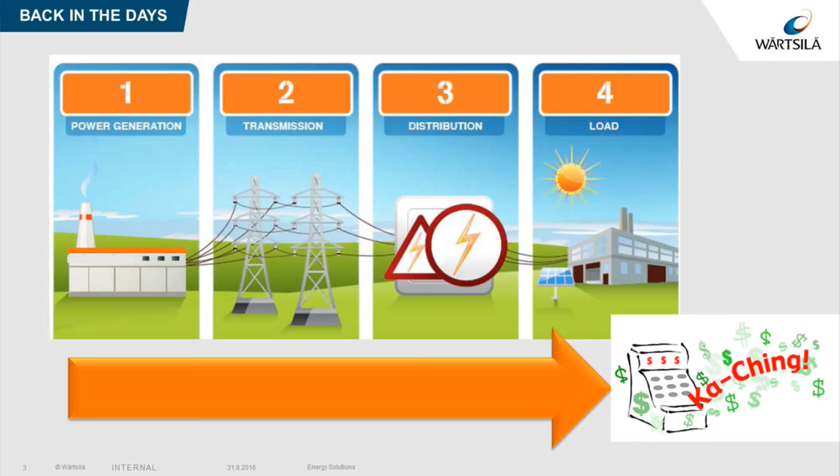And you kind of knew always what the load would be from season to season, from day to day, based on earlier statistics. For many of the energy companies, it was just cashing in with the money. Now this is changing. This is changing fundamentally, and new business models have to be found. So there's a lot of big changes going on.

We had the wind coming first into the market, so to say - the wind energy and the wind players, you all know this. After that came solar energy, and let's say from a capex purchasing perspective, even cheaper than the wind, and definitely from an operation and maintenance perspective, very cheap.

But there are some things about these renewable energies which make them difficult to handle from a power system perspective. I think you know what it is - it's the variation. The sun doesn't always shine, as you know, and wind is there sometimes, but can you be sure that you have the needed power generation when you always need it? How can we ensure the reliability? How can we ensure that the lights stay on in this auditorium at all times?

Especially here in Finland, we are really used to having a reliable power system. How many of you remember when the power has been out the last time? Hands up. Not too many. Go to Bangladesh and ask the same question, and some of them will remember when the lights were on, if I exaggerate a little bit.

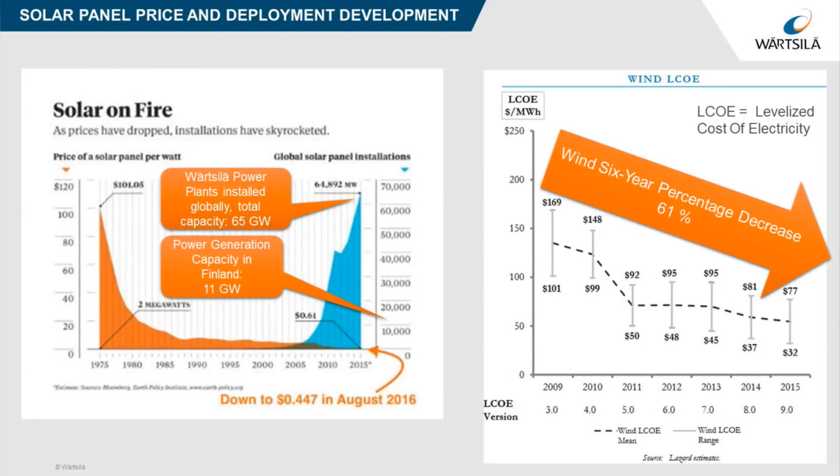This is the lowest we have seen so far, from 3rd of October in Saudi Arabia. This price was with the solar panels only, but then of course you need some auxiliaries—string converters, frequency converters, cable connections, transformers, grid connections, switch yards. So the total cost is below 2 cents per kilowatt hour in Saudi Arabia now.

A 300 megawatt solar project that would power maybe around half of Helsinki's needs, if you have the real power there.

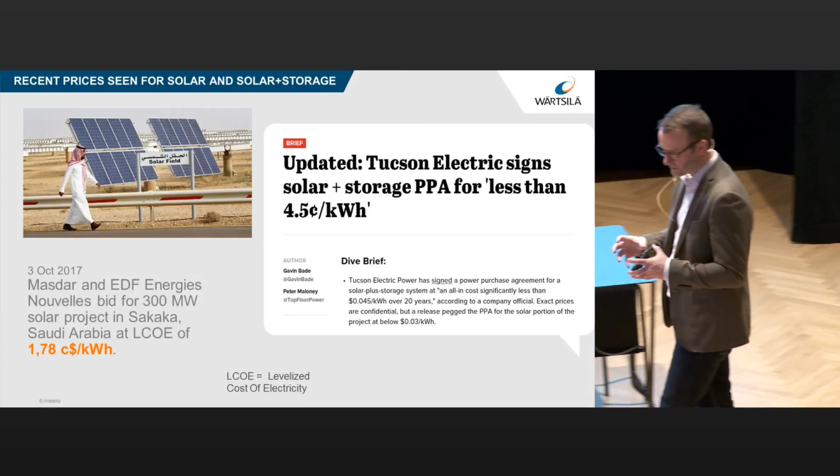Another interesting case, this is from Arizona, Tucson Electric Power Company. They made a bundle deal with solar and storage. PPA means power purchase agreement, of 4.5 cents, US dollar cents, per kilowatt hour. Really, really low price for a bundled solar and storage deal.

And at that point, we had people saying that, well, now you don't need any peaking power anymore. You don't need any gas-fired solutions anymore, because if you can have this bundle deal for solar and storage, then there's no way out.

So the question we are asking ourselves as a company now, Wärtsilä, is: is there room for us in the future? Or can we rely solely on wind and solar and energy storage? Elon Musk is preaching that it'll work. We maybe don't totally share this, and I'll talk about that as we go further now.

But really interesting strategical question for us as a company, because we apparently build and deliver these, and we have the LNG solutions there as well.

So let's bring in some ducks. Anyone know this duck's name in Latin? Me neither. Nevertheless, I brought in a duck here so that it would be easier to explain if you hear about something called the CAISO duck from California.

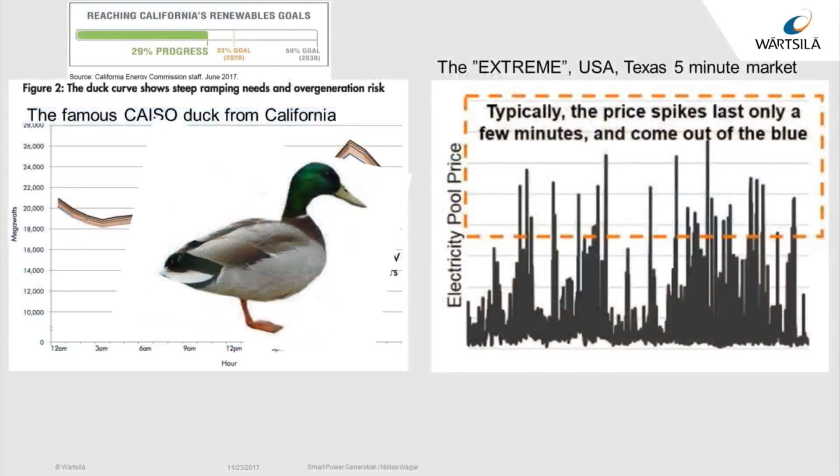CAISO is the system operator in California, the electric power system operator. And if we get rid of the duck this way, you'll see the back of the duck here and the head of the duck here. This is the hourly generation on the x-axis during a day.

So here's morning, 3 a.m., 6 a.m., 9 a.m., lunchtime, and then afternoon. Here is the y-axis, the megawatts needed, or in gigawatts, 20 gigawatts needed during the nighttime in California at the moment. These are curves that we look at a lot, because we need to model the daily changes, the hourly changes, in order to see how our solutions fit into the system.

When you look at, and think again about the poor duck and the back of the duck, this is the power you always need during the day. And why this is dropping down here is because they have projected the solar installation amount in California. So the more solar they get in California—and you know there's a lot of sun in California—then the daily need for other generation is pushed down.

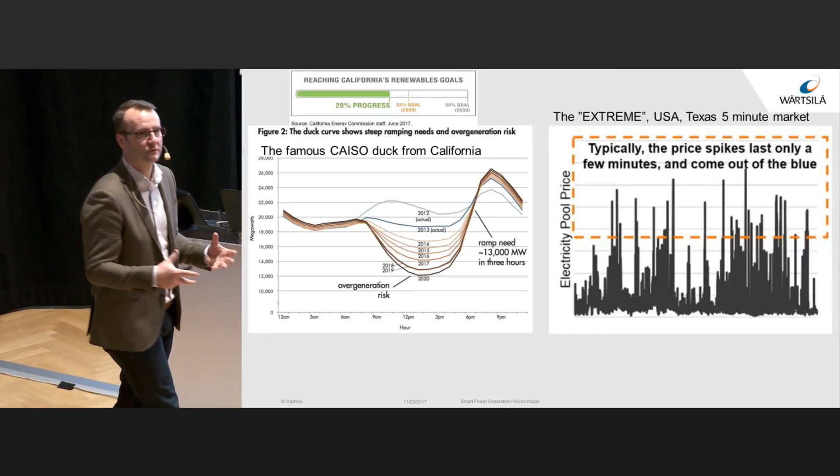The problem with the duck head is that in the evening the sun is setting but it's still hot, so you need coolers, usually electrically driven. You also have other appliances - you've been out all day with your iPhones, iPads, maybe some Samsungs, and you need to get their energy back to them, plus other appliances needing electricity in the afternoon. So you have a huge peak always in the afternoon, and then you'd need to ramp 13 gigawatts in this scenario in 3 hours - like powering up all of Finland's generation capacity in a few hours. So how do you do that?

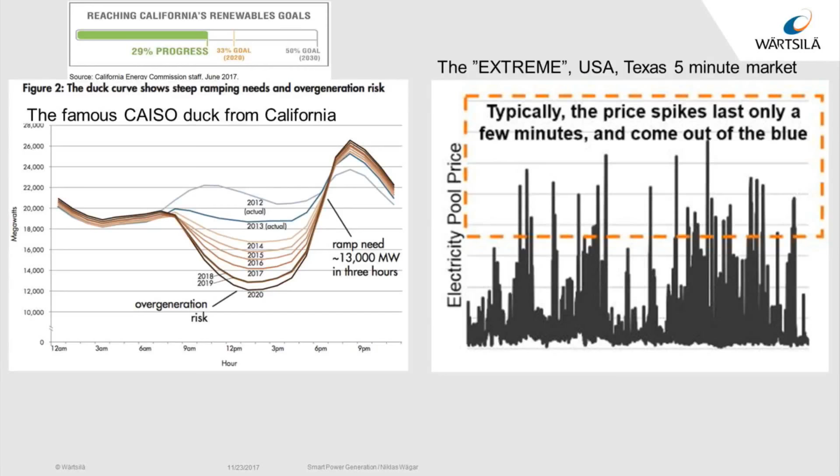When you look at the progress California is making, because they really want to make a mark in terms of being green in the US, they have 29-30% progress toward reaching a 33% renewables goal by 2020, and 50% renewables. But not even in California do they think they can do it solely with renewables. The other interesting point is that not only in Texas but in many other states, they've allowed for a really free electricity market.

They have an electricity market now which is a 5-minute market, so they actually allow for price spikes when the wind isn't there and the sun isn't there - really high price spikes. This means the electricity pool price can have spikes like this during the day. If you look at Nord Pool in the Nordic countries, it's really stable, and thankfully we have hydro in Sweden and Norway, some in Finland, that we can rely on. It would of course be excellent if you always had the hydro there to do the balancing of the renewables.

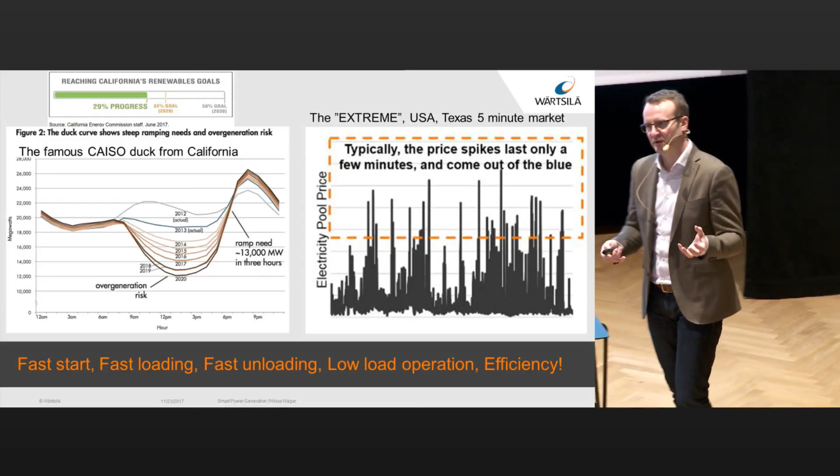But what do you need in order to follow the neck of the duck? You'd need generation that can start really fast, take load, start producing power, and ramp up and down in loading really fast. You'd need fast unloading too, meaning when the wind blows and the sun rises, you can pull down the generation. You'd need low load operation so you're ready to go when needed. And you'd still need to be efficient, especially with fossil fuel generation - you need as good a heat rate as possible to make the best use of the fuel.

What we see now in certain states in the US is that it's not the traditional generation that's the base load anymore - nuclear, coal, or similar. We see, especially in the windy states in the middle of the US, that renewables are becoming the new base load. They have such tremendous amounts of wind that they can provide the new base load, especially during daytime when the sun is there as well.

But what you need is something flexible for balancing consumption and generation, because generation and consumption need to be equal at all times - you need to have the scale and the balance. Yes, you can store some in batteries, but not enough to keep the lights on at all times.

We've been working a lot around these items because people realize the wind is fluctuating, and people know the sun is rising and setting every day. This would be a perfect curve if there weren't any clouds in between, but you may also have clouds in between. So you need something there to keep the balance.

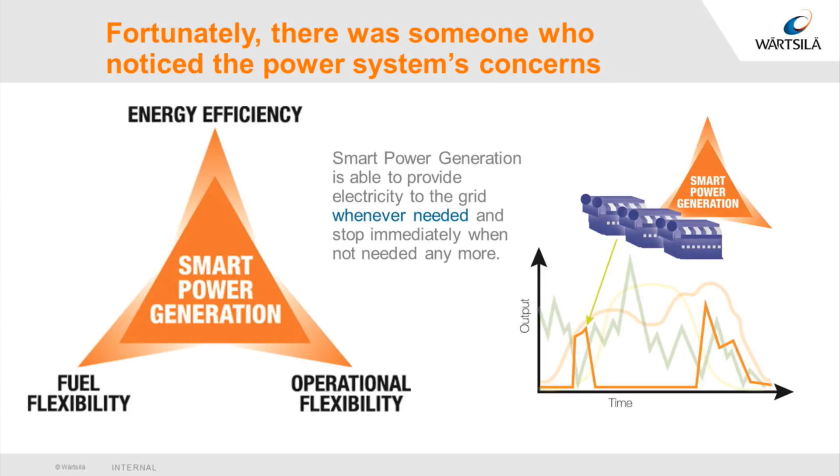We noticed this happening and tried to bundle it into a package we call Smart Power Generation. Smart Power Generation is about fuel flexibility. It's about energy efficiency - when you operate, you need to be really, really efficient. Smart Power Generation is very much about operational flexibility - how can we have an asset, a generation that can be really fast in starting, loading, and unloading? And that's what our solutions can do.

We didn't leave it at only looking at what we could provide as a solution. We checked and analyzed, calculated together with different authorities and energy companies, what this means for your power system. What can we do to your power system to still keep it reliable, keep it affordable, and naturally also sustainable? That's what Wärtsilä brings to the market.

Didn't I do a great job? No corporate slides before slide 14, right?

This is the thing. We bring efficiency to the market. We bring environmental solutions to the market. Gas-based, LNG, clean tech, if you like. And we bring the fuel flexibility. So this is what we bring to the market.

How we bundle it is into engine power plants, looking like this. This is one of our first LNG installations in Tornio, which has had recently a mechanical handover. And the first ship with LNG has just arrived to Tornio, so now we will be able to test and validate also with the LNG coming into this terminal.

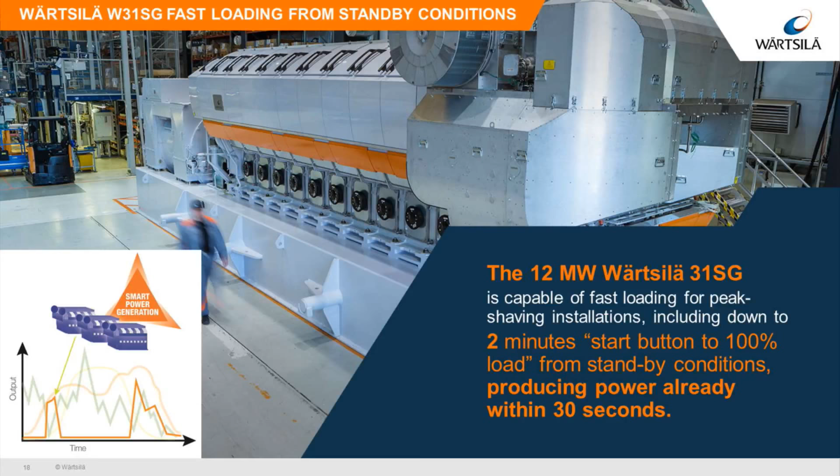First of all, the prime mover, the core thing for us is still the engines, and it will remain so. For 20-30 years at least ahead, these engines will have a big role in the future power systems. Why? Because they are fast, they are flexible, and when you need them in simple cycle efficiency, they are the world's best. They are better than gas turbines in simple cycle efficiency.

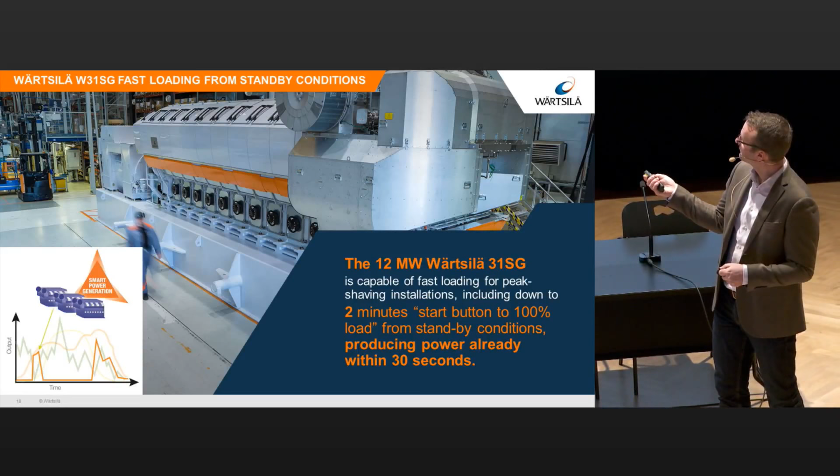This particular engine is called Wärtsilä W31 because the cylinder diameter of the pistons is 31 centimeters. We launched this new product to the market actually last week. It's 12 megawatt in unit size. Here's the generator. Here you have 10 cylinders, and then there are 10 cylinders on the other side.

And here's a turbocharger. The interesting thing with this is that you see, here's one of the assemblers. This piece you can get into full load 12 megawatt in 2 minutes only. And when you think about again the renewable side and the variations with renewables, 2 minutes is all you need. So you can wait for the decision to start your asset until it's really feasible from all perspectives. And in only 30 seconds, you are synchronized to the grid and start to provide power.

Talk to any power company guy, and these are values that they like. 2 minutes to full load, and if you have a number of these, 10, 12, you can have 100 megawatt, 120, really, really fast. So coming back to how have we been looking into the total power system and what can we do in terms of supporting the power system.

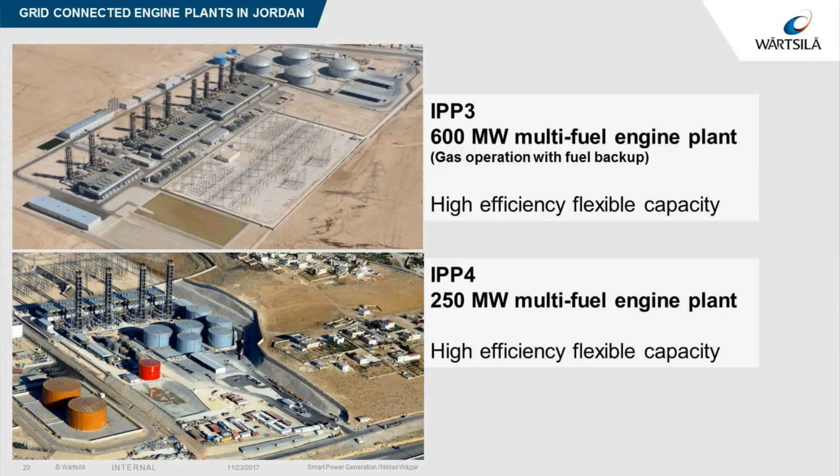These are a few examples from Jordan, 2 fairly big power plants, also from our perspective. One is called IPP3, 600 megawatt, and the other one is IPP4, 250 megawatt. These power plants were delivered as operating on fuel, and then we converted them to gas operation.

And the interesting thing here is that before these engines and engine-based power plants were installed in the system, you had the following variation. If you remember the California duck curve, which was a daily curve, this is now a weekly curve. So you go from Sunday, Monday, Tuesday, but you see a little bit of the same pattern there, that of course you have less need of generation in the night time, and then in daytime when industry, schools, service companies, whatnot is starting, then you need more power.

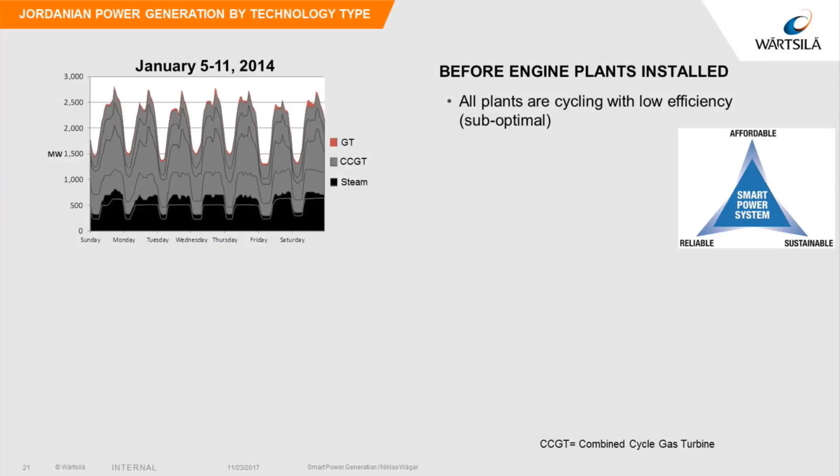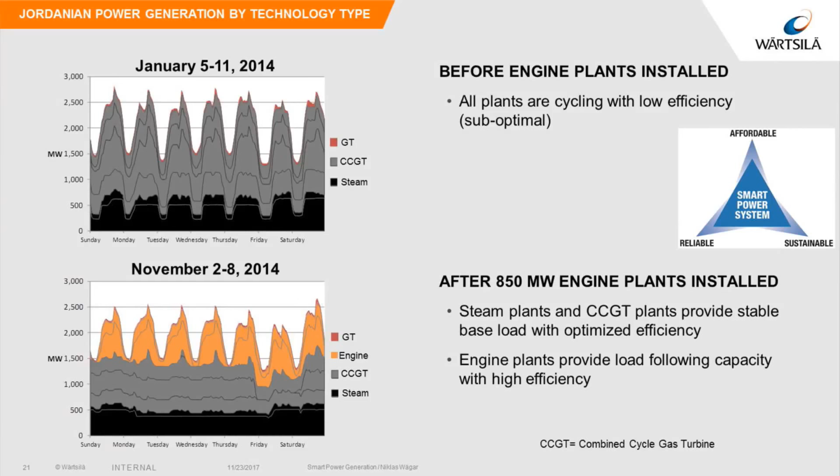In this case, you have some steam generation, probably coal, combined cycle turbines, and some peaking turbines, and you can see a lot of variation up and down. After we installed the engines, we took care of this peaking up and down with engine solutions. This meant the steam generation could continue to operate, but more in base load, meaning they operate at a more stable operational point where total efficiency is higher. And since we have really high simple cycle efficiency, from a total system perspective, the system efficiency is higher.

So we could still maintain the reliability of the system. We can have sustainability because you cause less emissions when you can operate on a stable point with these units, and so on. So that's one of the case examples.

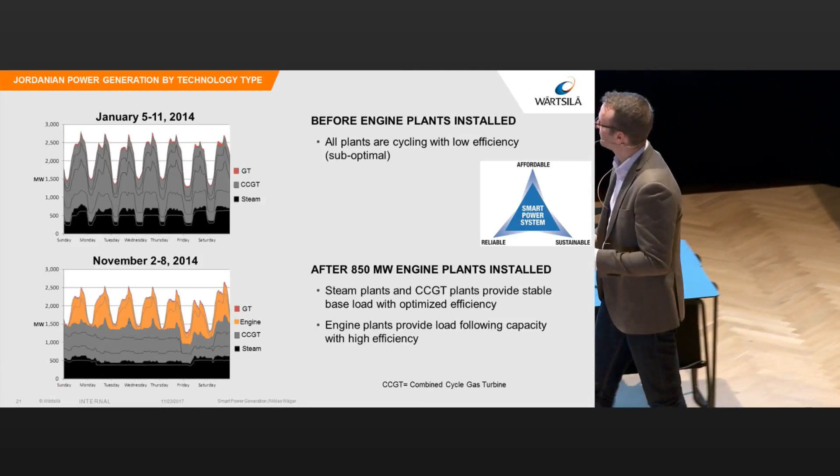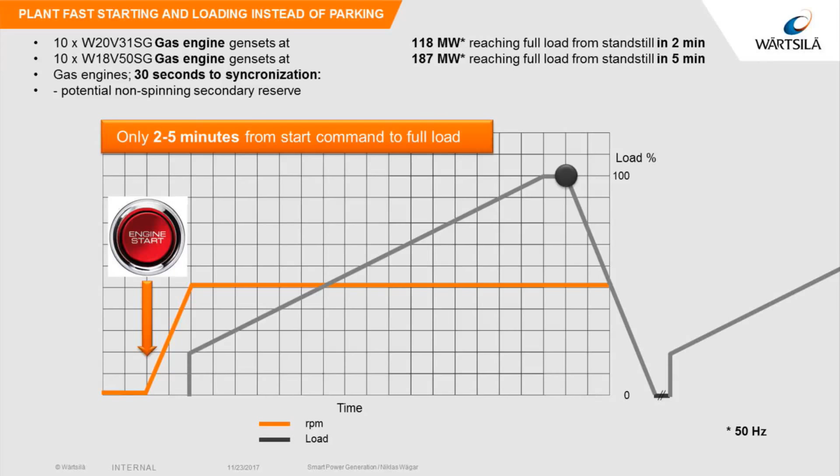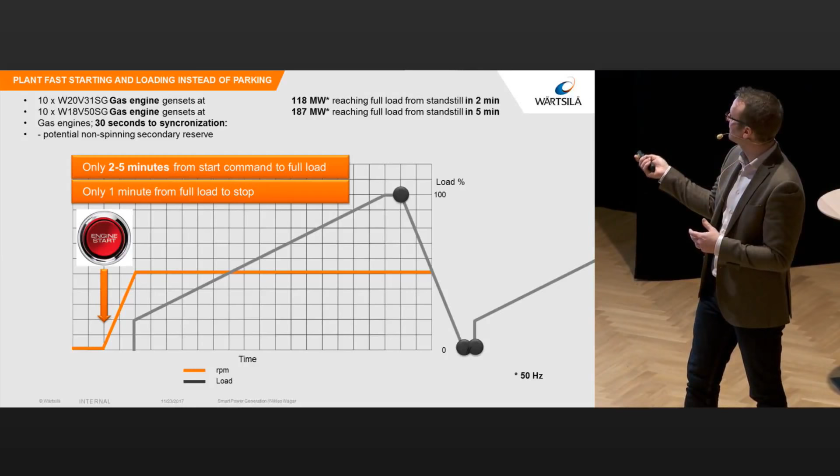So as I mentioned, with these units we can go to 118 megawatts in 2 minutes, and with the bigger gas engines that we build in Trieste, Italy, we can go to 200 megawatts in 5 minutes easily, because you can start these engines simultaneously. You don't have to wait for one and then the other and cascade them, you can start them as per the need. And again, the good thing is that you can stop them and unload them really fast. Of course, you can cancel this decision at any point and go back again, and then there's just a few minutes of safety checks, and then you can start again.

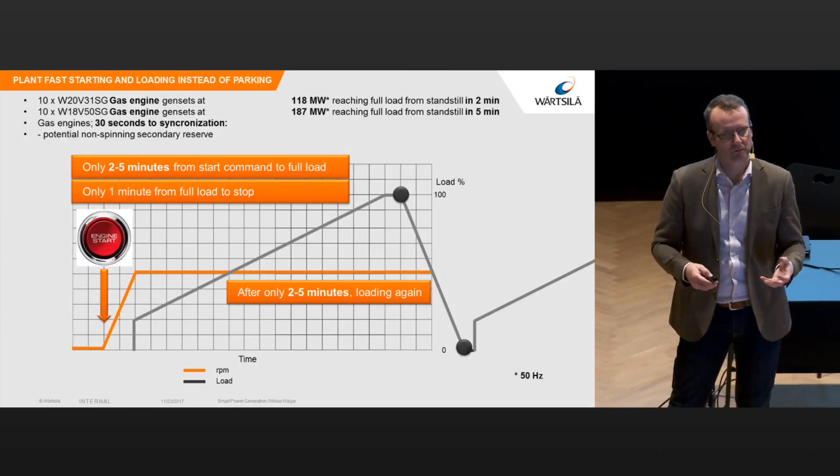Several times a day. This is also good because the predictability with solar and wind in the system is different to what you have otherwise. And then it's good that you can start and stop several times a day without major impact, or more or less no impact on the whole life cycle from an O&M perspective.

Another case example, this is from Turkey, a plant consisting of a number of our 50 product gas engines built in Trieste, Italy. This is a screenshot from the SCADA system in the control room. What you see here is a 2-hour x-axis curve of a historical trend, and on the y-axis a scale from 30 megawatts to 110 megawatts. You see two different trend pens printed in this chart from the historical operation of this plant.

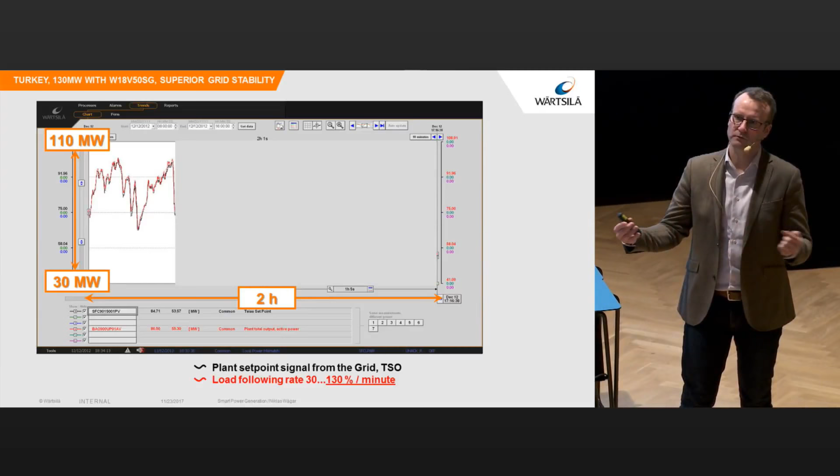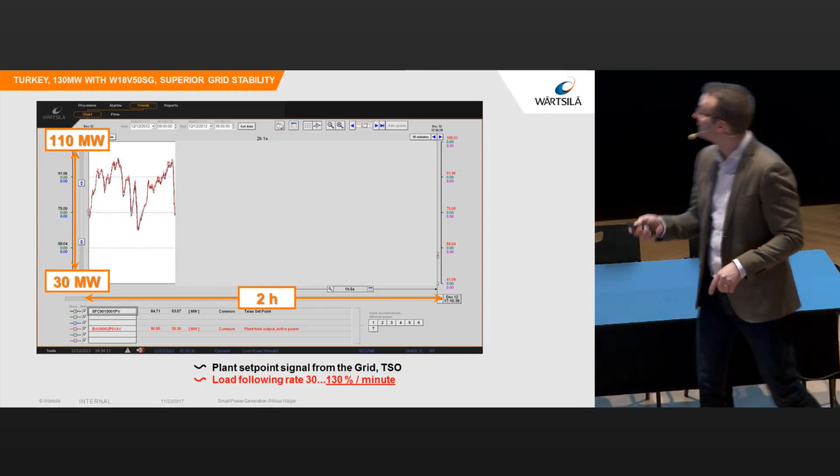The black pen is the set point coming from the transmission system operator grid control center, so that's what the grid and power system need in order to stabilize the grid. The red curve is how we follow with the plant. As you can see, they really lie on top of each other here, so you really follow the demand.

The interesting thing comes always at this point, or whatever point here, is: where should I go next? Would I need more power? Would I need less power? Can I run flat out for a while? And we say it doesn't matter, because you can follow however is needed. You can be really chasing the wind, chasing the solar with these types of units. You can go up and down all the time like this.

And you see, we follow the set point coming to the power plant with a 1 second interval, really fast, and follow the power needs closely. This is also what the power system guys like, and what you as a consumer want to have, because you want reliable power, and you don't want to remember when you had a power blackout or some disruption in your power system the last time.

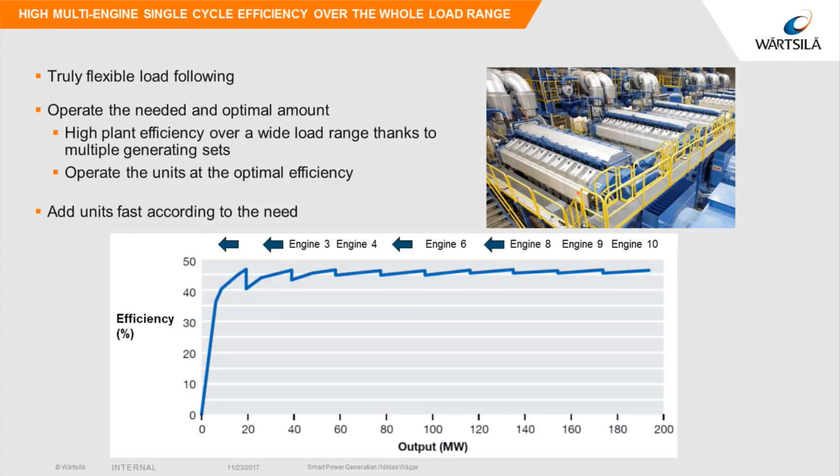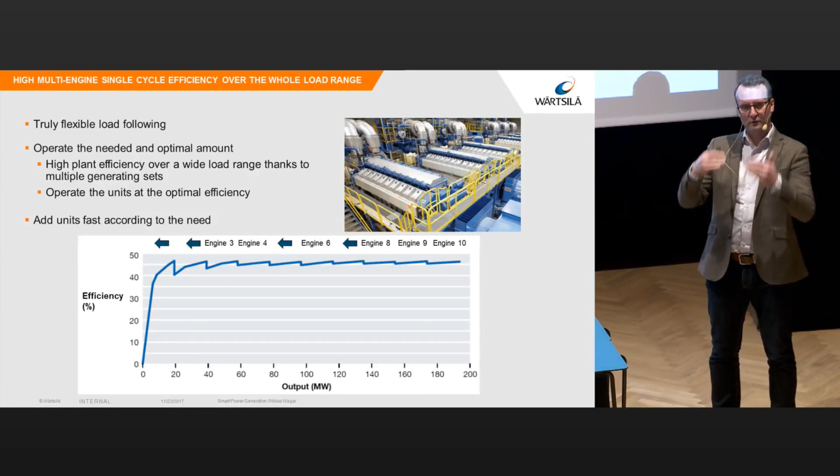If we talk about efficiency, how can we maintain high efficiency? That's based on having multiple units. So you have a number of engines there, all of which are 45, 46, 47, up to 49% simple cycle efficiency, and then you operate the needed amount. If you have a big unit, usually the efficiency curve drops off in part load operation—you cannot maintain as high efficiency. But when you operate only the needed amount of engines, you can always keep the total efficiency high, at 45-46% levels. So this is part of the beauty of having multiple engines and multiple generating sets in the power plant.

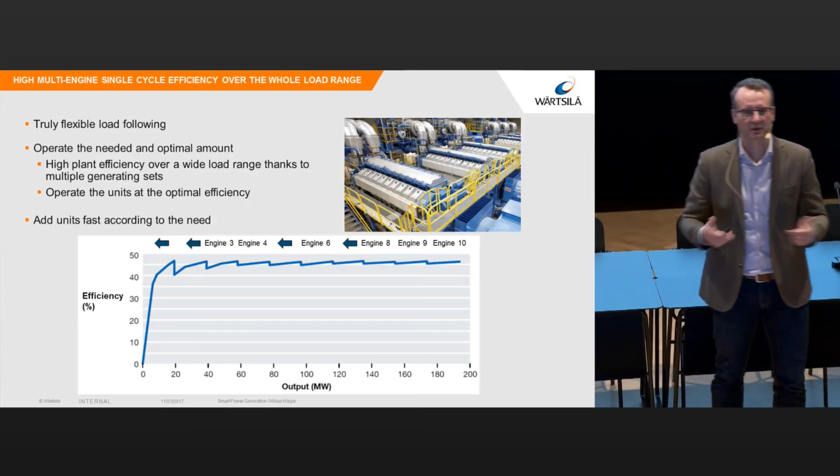The other thing is the reliability aspect here, because should there be some issues with one of these engines, it's 1 out of 8, 1 out of 6, and so on. So you can work on the reliability also on the asset itself.

Fuel flexibility is another interesting aspect, for those interested in chemistry. There's a wide variation from liquid fuels into gas. The main intention with this slide is to show what kind of solutions we have to cover different kinds of gases. Biofuels are somewhere here, so we have solutions to operate on biofuels, and biogases are somewhere here, not visible now in this chart.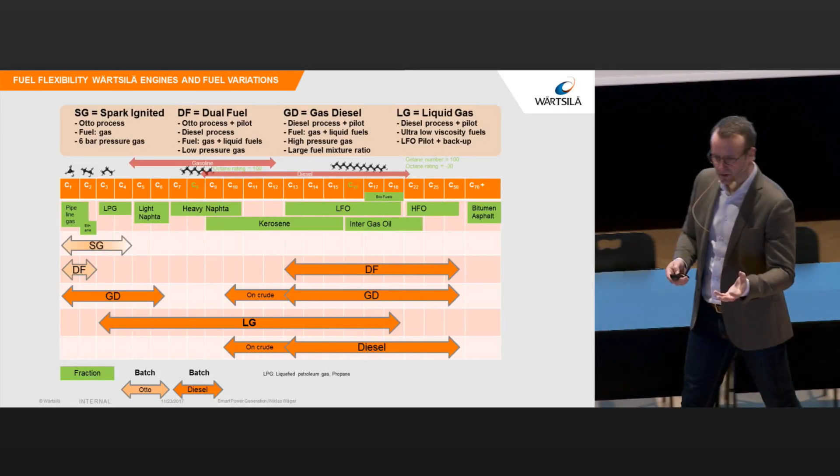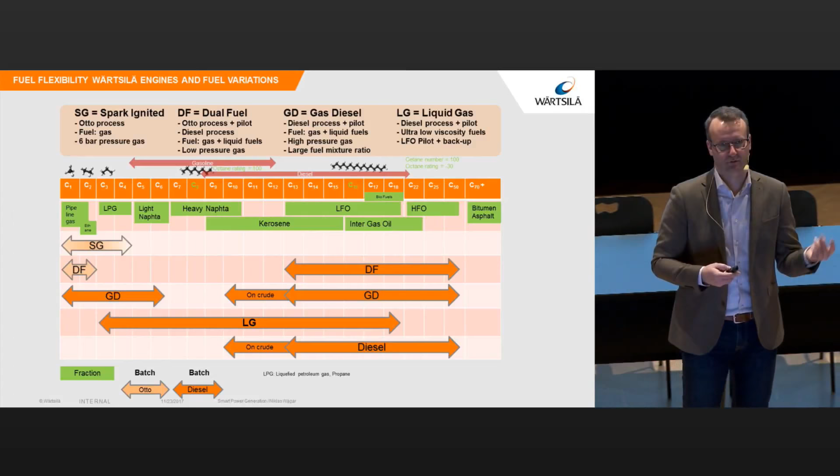The solution is that there are possibilities for certain fuel flexibility depending on the needs, and this is important because if you go out to very remote areas with gas supply problems, you may have to operate on liquid fuels for a while, then switch back to gas immediately. Our units can switch over to liquid fuel without the generator coming down, and you wouldn't even notice it in the frequency operation.

This sounds all fairly good, right? So have we had any successes except the Jordan case with our smart power generation messaging? Are we getting heard by power companies, investors, and the likes from the systems we have? Actually, to a fairly good level.

We believe so strongly in our potential with smart power generation assets that we've been writing a couple of books. First, we made a book called Smart Power Generation, an orange book. Then we did another book called Power System Challenges. The first book is sold out, so maybe you can only find it on eBay or something nowadays. The blue book is still available, and you can download it at this site.

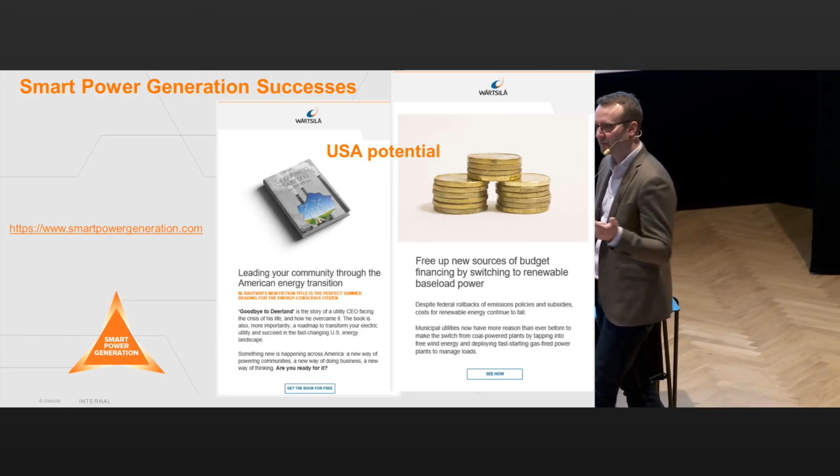Recently we made a third book called Goodbye to Deerland. This book tells about a utility in the US that's been investing in a coal-fired power plant. It's built a bit like a storytelling book based on facts, about a utility guy who's really proud of his coal-fired power plant. But then comes this energy revolution with wind assets and solar into the system, and sooner or later he realizes he can't operate his beloved coal-fired power plant for the future.

Not only from an emissions perspective, but actually from an economical perspective. At some point he needs to decide what to do to keep the lights on in his company and keep the customers happy. And sadly enough, guys, everything comes down to the money. We have to think about return on investment, and what's the value for the end customer in US dollars, euros, or whatever currency is in these different locations. So we do a lot of analyzing and look into the money aspect as well.

I know you'll go to the smartpowergeneration.com site, and there you'll see real life cases. We've done a lot of modeling in different places all over the world. Different states in the US have different power pools, like the Nord Pool in the Nordic countries. In Texas it's called ERCOT, PJM in Pennsylvania, New Jersey, Maryland, and so on. There are some other cases here as well. So we've looked at these different cases and tried to see what the value would be in these different markets.

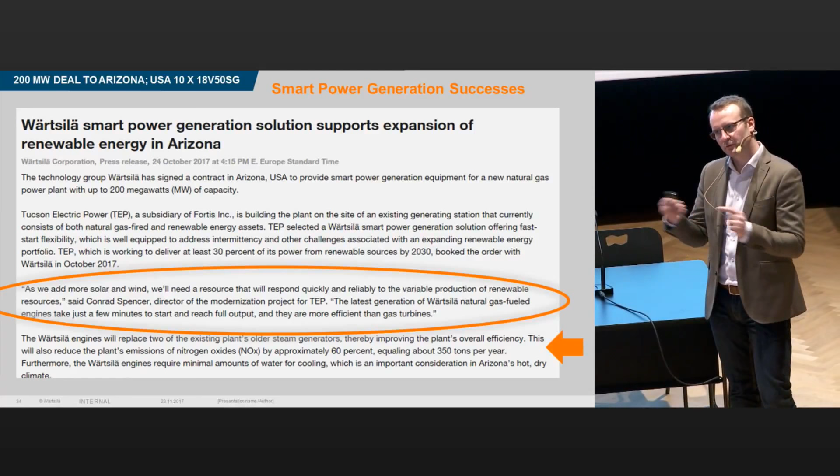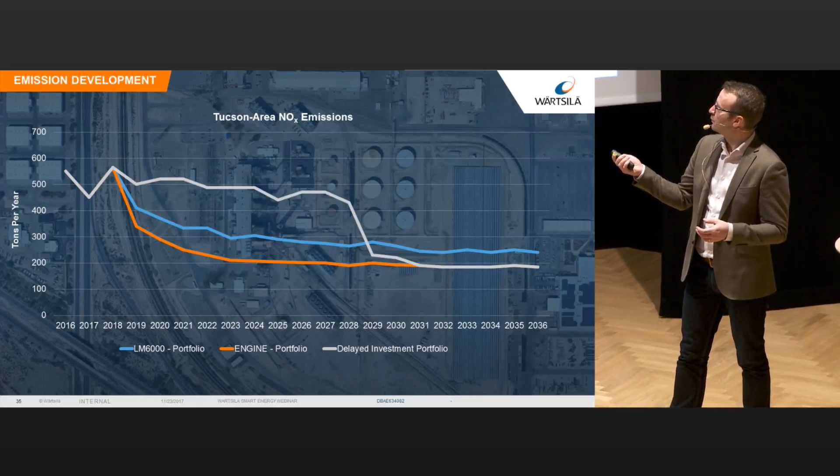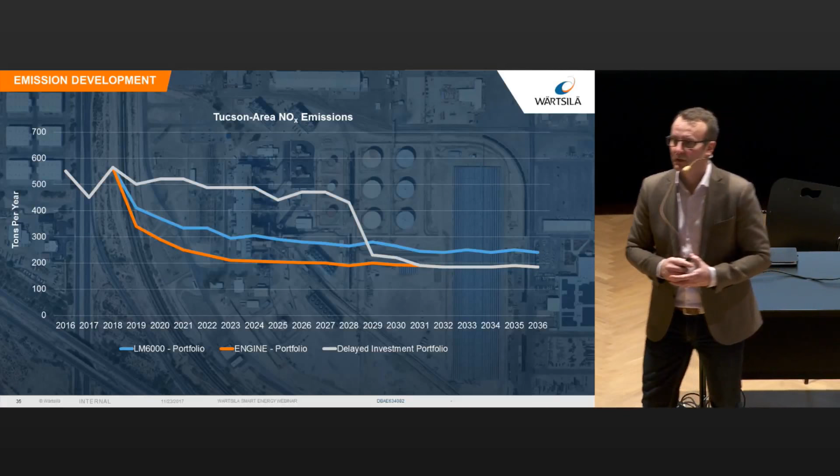The other aspect I like a lot is the emissions sustainability statement, because we haven't talked so much about sustainability during this first part of the presentation. When you look at that, we can reduce plant emissions of nitrogen oxides, NOx, by approximately 60%, 350 tons per year. This is the projection from the customer Tucson Electric, showing what would happen if they continued without investing in a new portfolio. The blue curve is with a unit from the competition, a turbine, and the orange curve is with our flexible units. We're really proud that we can show this 350 tons per year less of NOx for the Tucson Electric area with this kind of asset, with the rest covered by wind and solar, which isn't causing any emissions during operation.

Excellent. Other successes, if we go a little closer to Finland, to Europe, here is a case from Germany, from Kraftwerke Mainz Wiesbaden. This is a case where you don't need solely electricity generation, but you also need some heat, some district heating for the city of Mainz.

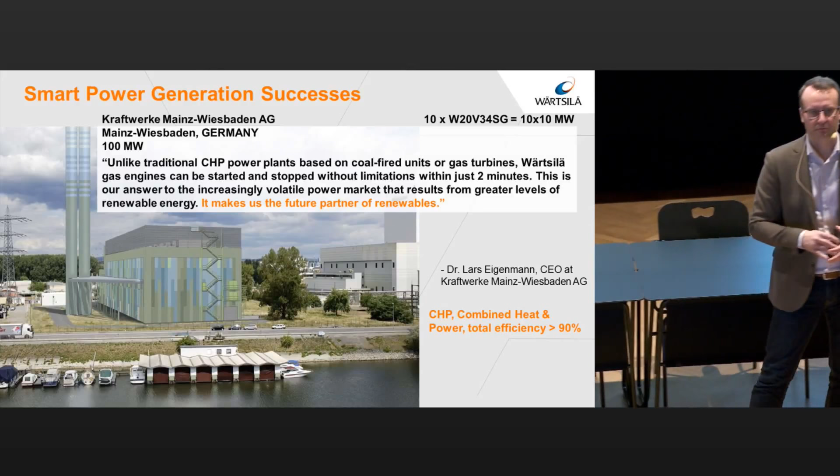As we go further north, we have a different climate, and at least during part of the year we need some kind of heating as well. So here we use heat recovery systems from the exhaust gases of the engines. When you operate in CHP mode, you can reach really high total efficiency numbers, above 90%. The other interesting thing is that they will install a fairly big water tank, so that at night time, when they have excess wind and electricity prices may even be negative, they can heat up the water tank and use that as a heat source during the daytime instead. So ultimate flexibility in that sense.

I think you told me that you will meet Mr. Hietanen from Wärtsilä next week. He was there during this groundbreaking ceremony, and Mr. Hietanen was really happy that we could show we are a partner of the energy transition, the Energiewende in Germany.

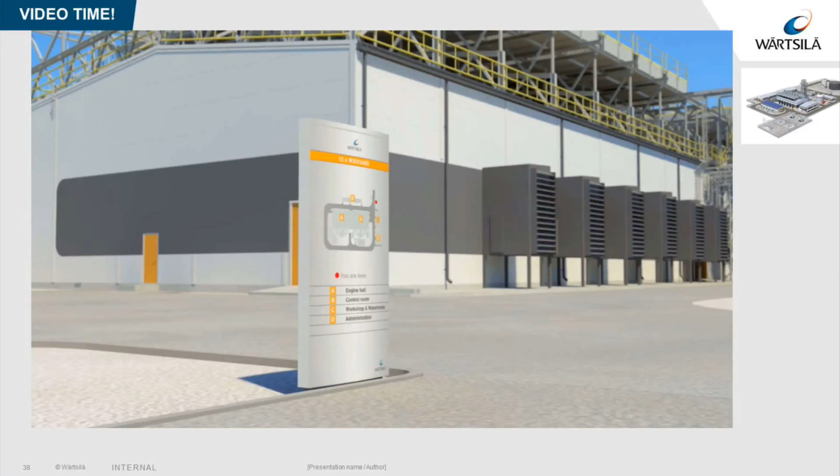It's a little bit similar to Lego blocks, but maybe Duplo blocks instead because they're a little bigger than Lego. Anyone who likes Lego in the room? Excellent. Me too. Very good.

I really like this because this also... Then I think we need to talk a little bit about renewables and storage coming into the picture. I already told you that they are a friend of ours and of you in the future electricity system, but we really see that they can support our system a lot. I would like to give you a very short market overview.

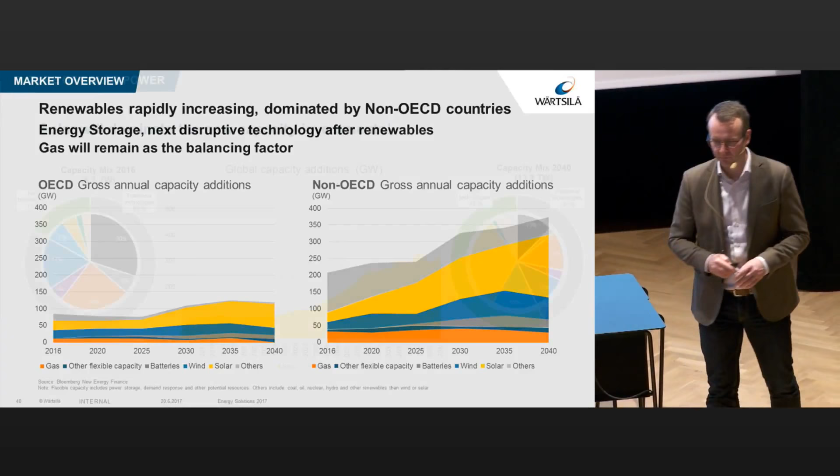If we look solely at the solar side, and look at the capacity mix today, or let's say 2016, this is how you see the new technologies. The projection until 2040 is that the new technologies and biggest increase will come from solar. This is really the unstoppable part from prices coming down and the potential with solar. Now, we happen to have a fairly good reference base, as I told you, and many of which are really in hot, good solar radiation areas.

So we have quite some opportunities to leverage the installed base and the reputation we have with our customers, and then put solar there in addition. Remember the Jordan case, one of the power plants. This is the projected installation of a big solar plant next to this, so in order to save some of the fuel costs, you can bring solar there.

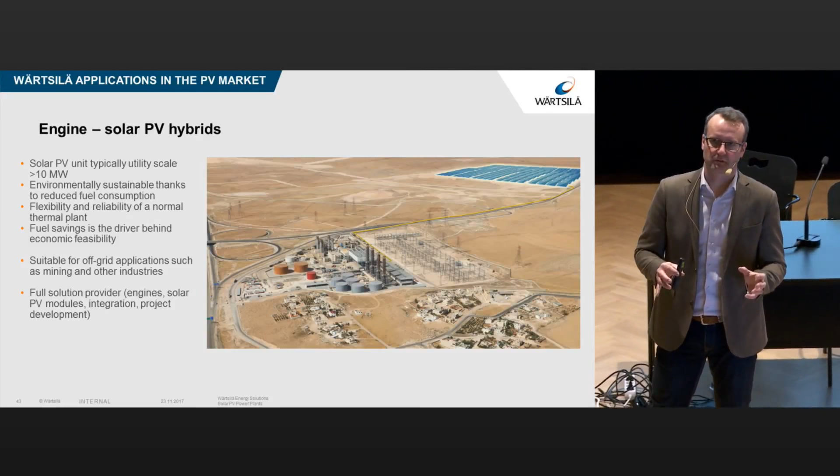Utility scale, of course, for solar PV is mainly more than 10 megawatts. And of course, you can use this in off-grid situations, in islands, grid islands or physical islands. But there's a lot of potential there with solar.

If you can save 85 million liters in 15 years, you start to have a fairly good business case. So here we are delivering 15 megawatts of solar power. We do need quite some space for this, 27 hectares to be exact.

But nevertheless, it's interesting. It's really a fast track case, which we are kind of used to, because the animation you saw earlier is usually how fast we can build these power plants, usually less than a year from contract signing, max 1.5 years since contract signing.

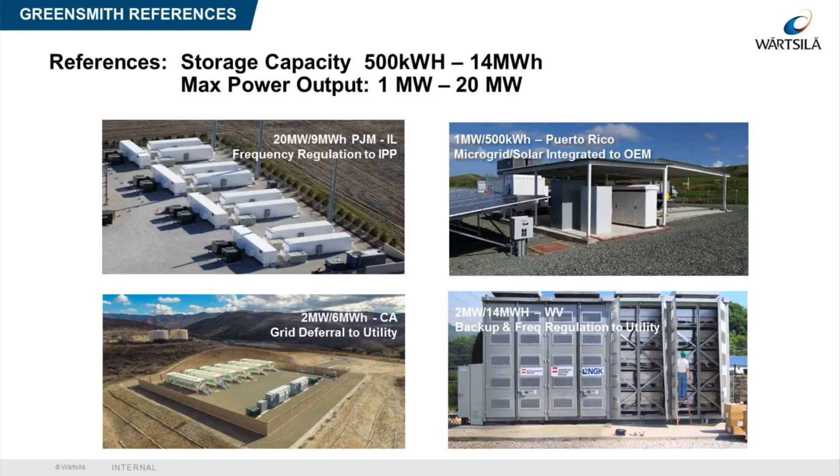And our Greensmith colleagues claim that they have actually more installed capacity than Tesla and Elon Musk have at the moment. But obviously Elon Musk is doing a better communication and PR message, because I think you have heard more about Elon Musk and Tesla than you potentially have heard about Greensmith and Wärtsilä. But I guess together we can change that.

Why we see that engines and storage is an interesting match is because we already talked about these values, features that can be turned into values. We talked about the efficiency - this should be 2 to 5 minutes actually. High ramping capability, 0.5 megawatt per second. High availability, low O&M costs, and life cycle is there.

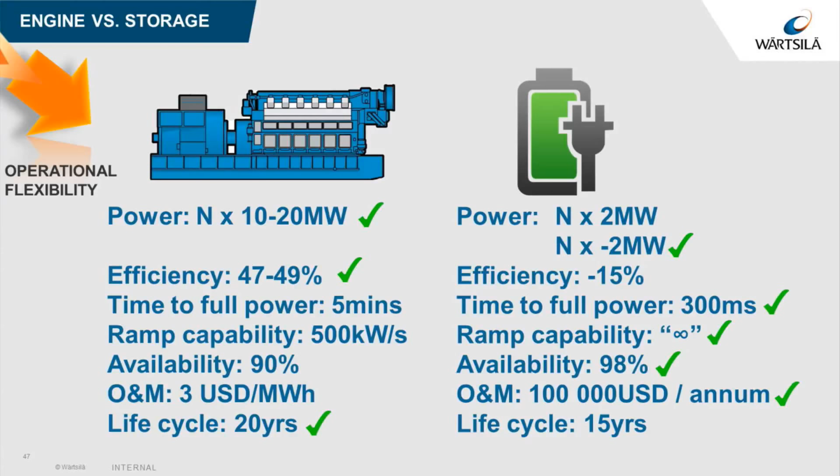If we add battery storage into the picture with engines, we can have really fast reactions. If we have otherwise fast generation, but when you can switch on the batteries in 0.3 seconds, 300 milliseconds, and have a ramping capability which is close to infinite, high availability, and so on, it's really, really interesting. And talking about a good match, we actually claim that when you tick off these different boxes here, it becomes a match made in heaven. It's really a nice match with fast engines and then storage in combination with these solutions.

The battery prices are also dropping, partly because we have electrical vehicles coming into the system. So that's of course supporting the development here.

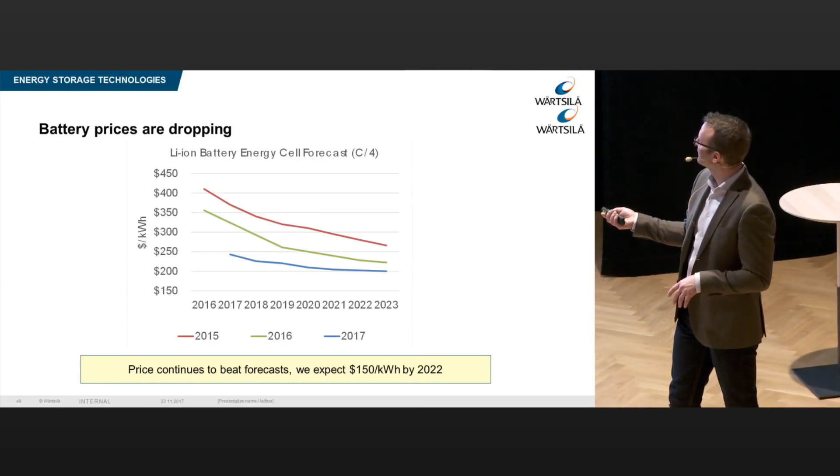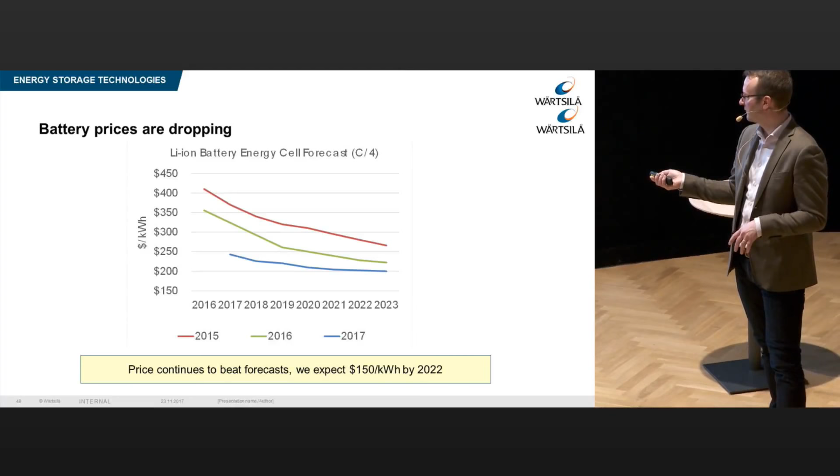The prices seem to continue to beat the forecasts, and now we are somewhere between 230 to 340 something in total installed dollars per kilowatt hour. And some claim that it should come down even faster than this, to 150 dollars per kilowatt hour by 2022, is some expectation there.

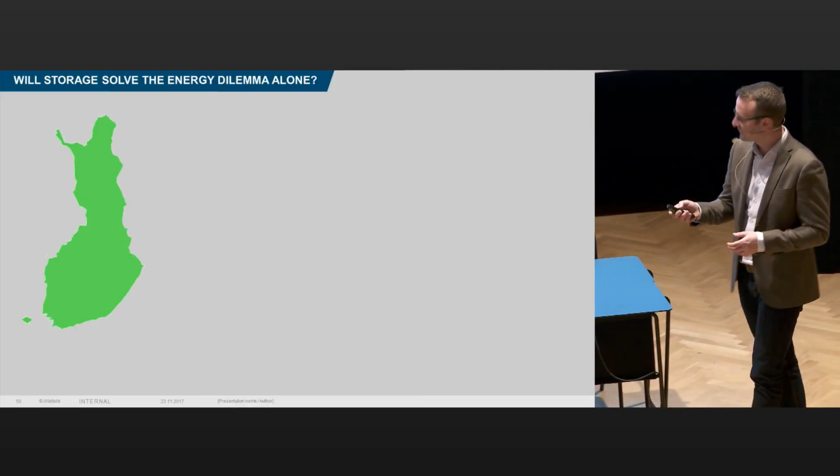And to put this into context, we've been looking at this a little bit from a Finnish perspective. Please remember now this $150 per kilowatt hour as a reference, if that would be the price in 2022. So in Finland, on an annual basis, this is how many terawatt hours or gigawatt hours you would need - 84 terawatt hours.

We calculated that if you would replace 1% of the energy need in Finland with battery storage, you could put a high price at 1,000 euros per kilowatt. Remember the earlier 150 euros per... but let's put 100 euros per kilowatt as a price for the storage, so that would be a competitive price. We are not there yet.

Maybe we will be in 2022, 2023 or 2025. We would need this amount of money. According to our calculations, it's the price of 9 times the Olkiluoto power plant to replace 1% of the energy need in Finland. So our message is, yes, energy storage in terms of batteries will play a role in the future in the energy mix.

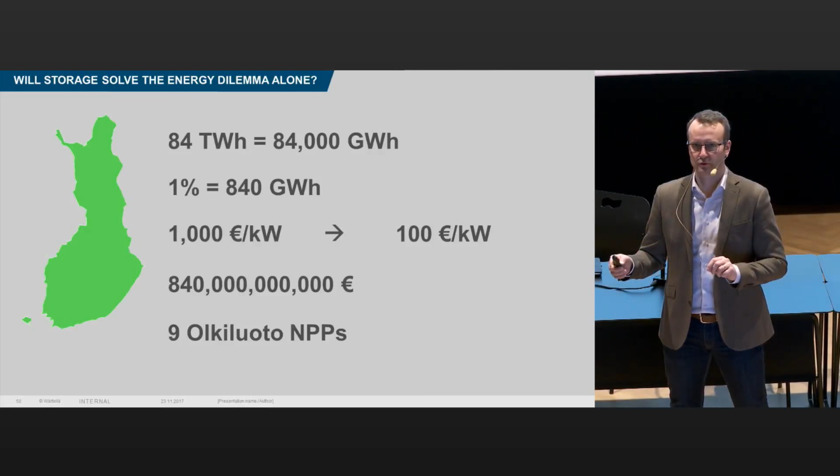Will it play a big role? No, it's excellent for doing this really fast response to renewables, but will it be a base load, so to say? Not necessarily, and please remember it has to be charged as well. So it's an excellent complement. And if you want to go to the details about the calculations, I have it there as a small note, but just to give you some curves on that one.

So I think we can conclude that there still needs to be something to support the renewables, the wind and the solar coming into the system. And we claim that the gas engines you've seen are a very, very good complement. Do we need liquefied natural gas? Do we need some other kind of storage? Let's dwell into that and talk about the LNG side and the LNG solutions.

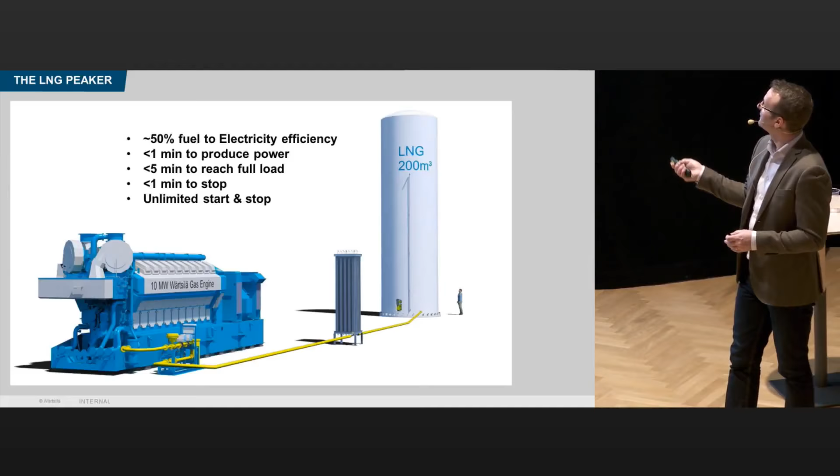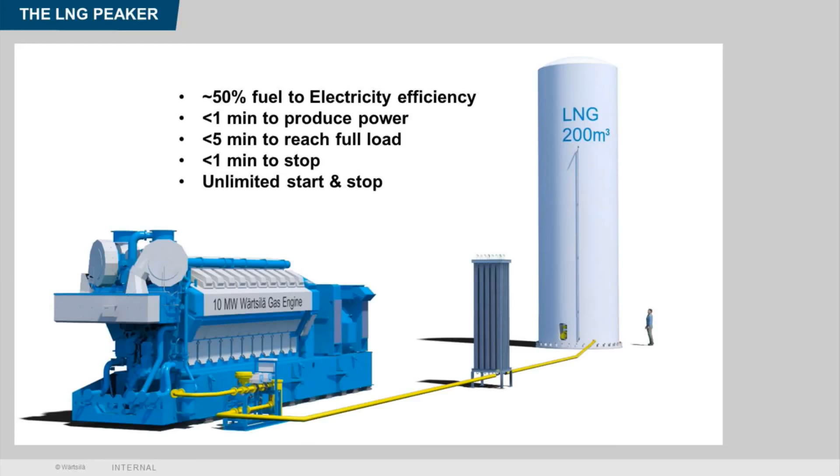This is, again, how a typical peaker would look like. And then you would need some 200 cubic meters of liquefied natural gas. Here, just to have a reference, you see a guy at 1.80 meters. The compression that you can do, from gas to LNG, is a factor of 600. So when you compress the gas, the volume goes down by 600 times.

The costs currently, I think this was calculated with 150 euros, or 350 installed as an EPC. So with everything you need for a battery at the moment, the cost conversion of LNG compared to batteries is a factor of 50 today. This means that for a gigawatt hour that you need of generation in a system like this, you would need 2,000 containers of 500 kilowatt hour in terms of compressed energy.

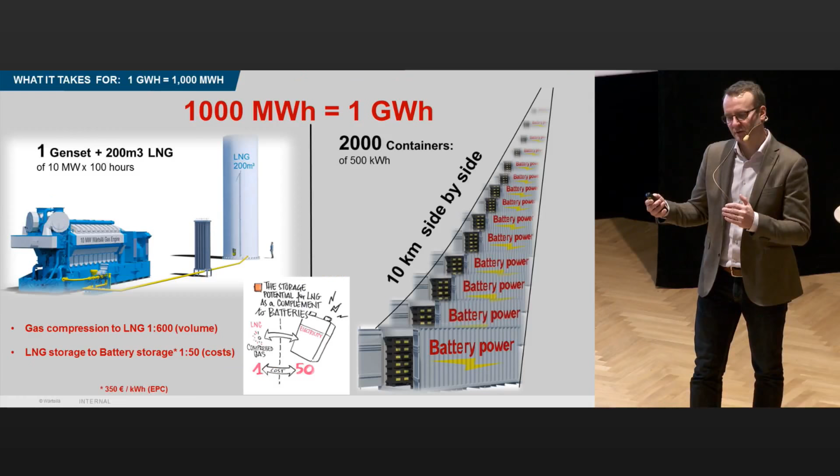So 10 kilometers if you put them side by side in terms of energy storage. So this is one way also of looking at the realistic, let's say, potential of batteries and so on. Excellent complement, but maybe not for the whole.

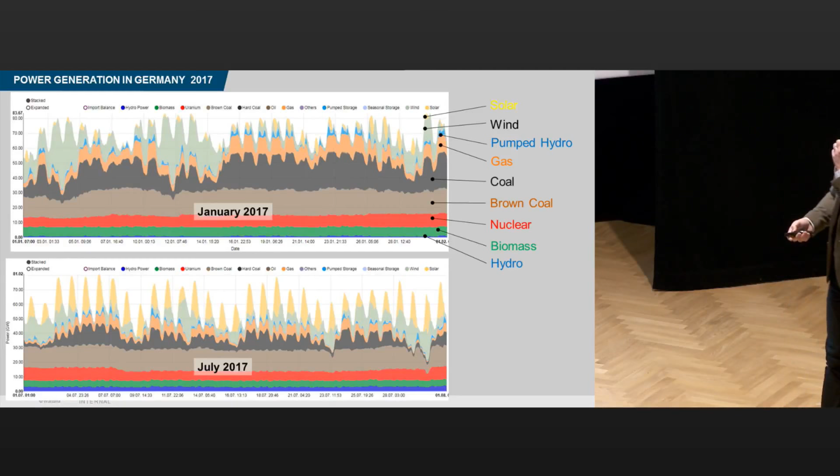We talked about Germany earlier, and I have some charts from 2017 power generation in Germany. Now you will start to know these curves already, you have different dates here, and then you have the gigawatts here needed in Germany during the hours and the days. So this is the whole January need, and here you see the July need. And obviously, they have a lot of solar installed in Germany at the moment.

So you see that in July, they operate mainly solar and wind, and can have less coal, brown coal, and nuclear. The interesting thing is that here, if you call it the base load, is around 50 gigawatts, and then in the summertime it is as low as 35 gigawatts. So remember again that the traditional base load is not what it used to be, it's pushed down.

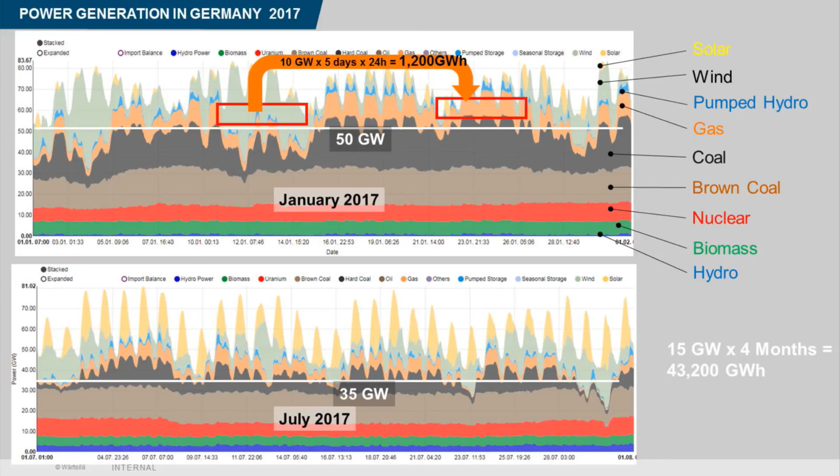But you would potentially need to do also some load shifting, meaning that here you have a fair amount of wind on these 5 days in January, but these 5 days here, it didn't blow. And you need to keep the industry, the services, everything running in Germany, also these 5 days. So where do we get this 1,200 gigawatt hours of energy in terms of load shifting? We calculated that also a little bit, and you could calculate it even further to load shift it to the summer period. And we checked the potential of this.

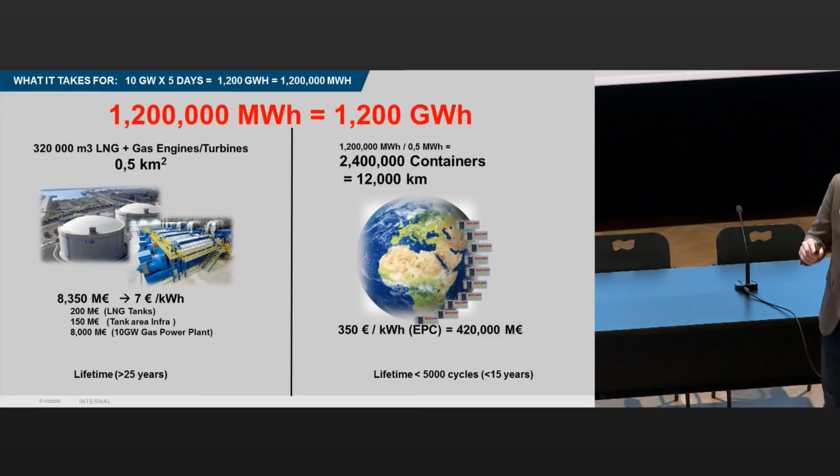These are fairly big LNG tanks. And then we came to the conclusion that you would need 2 million containers and 12,000 kilometers of energy storage in order to cover for the energy need again, if the same price is calculated. So the message here is, again, energy storage is an excellent complement, but perhaps mainly for supporting in the peaking. Maybe not the best idea for load shifting from hours, days, and seasons.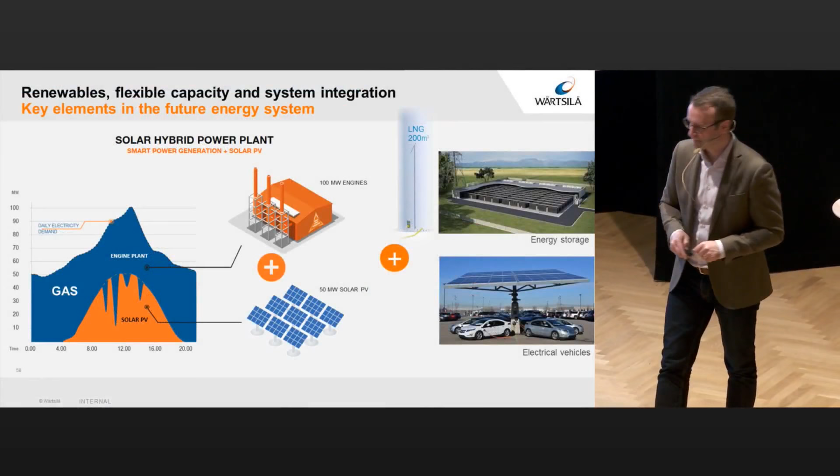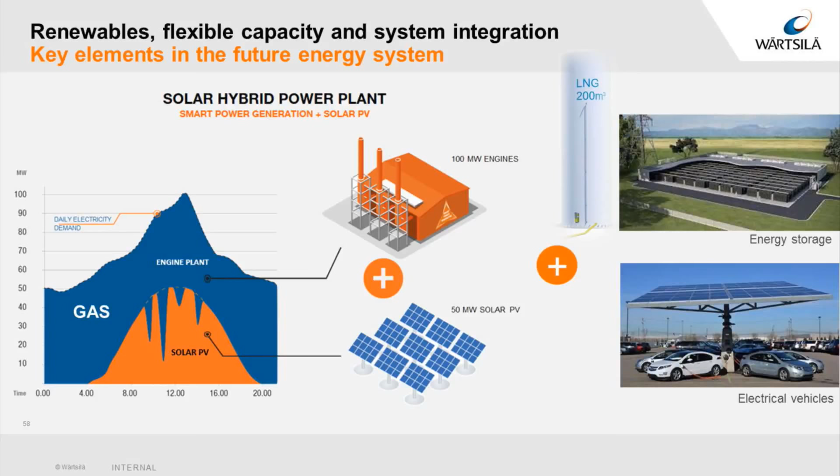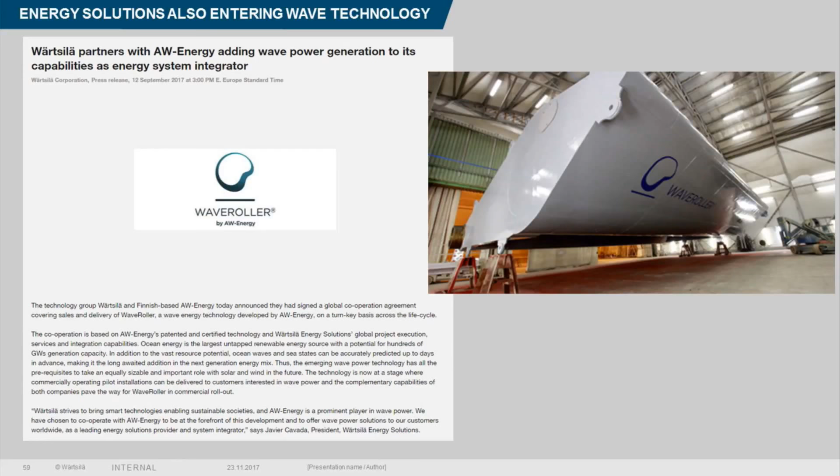So to conclude the presentation, we think that in order to cope with solar and other renewables, there is excellent potential with the engines. Probably we'll get some help from electrical vehicles, energy storage has a role there, and we do think gas in form of liquefied LNG will have a role as well. We have one foot in the marine industry too, and as late as September we've been looking into other potentials for sustainable energy for the future, working with this Finnish-based AW Energy company to see if this could be an additional interesting complement to our energy solution provision.

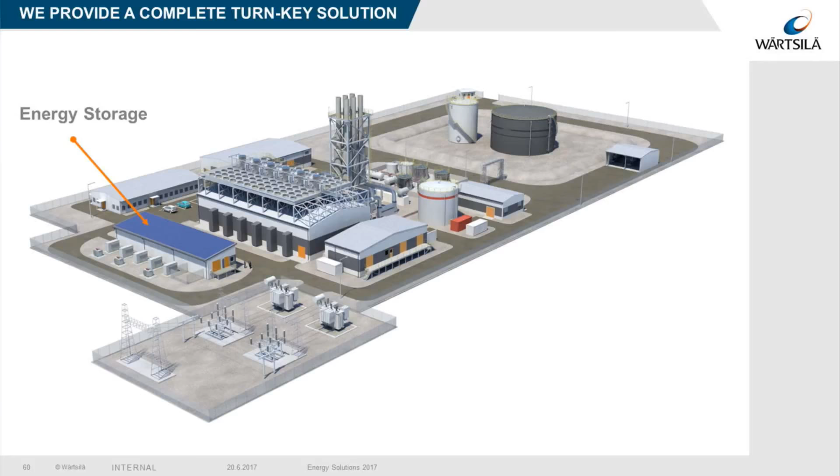So to conclude, a total solution provider with energy storage, with solar, either here or there. As you all know by now, the energy revolution from renewables is really here to stay, nothing can stop this. Renewable costs are being pushed down, introduced to the system, helping it grow sustainably. We can support the introduction of renewables, as we saw from the Tucson case and the case in Germany. We can answer reliability and power system needs with fast assets that can be started and loaded very quickly. We can save a lot of fuel or gas by introducing solar panel hybrids as part of our solution. The battery storage potential is there, but we claim it's mainly for reserve operation and fast acting.

And we do think that LNG, liquefied gas, can be a good backup, and hopefully, thanks to some support from the shipping industry, being available at an affordable price into many places all over the world. We really see that we have these solutions so we can support the introduction of renewables to help all of us work toward a more sustainable future.